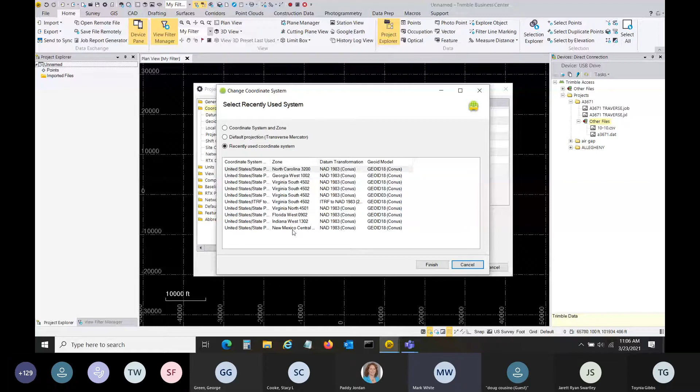So when you open up TBC and we go to change the coordinate system, all your last used systems will show up if you've been using the software. I'll just go ahead and show you guys how to set it up if you don't have recently used in there. So first thing, we'll go to coordinate system and zone, and we'll need to select our coordinate system group. I'm going to expand this out a little bit so you can actually see. We're going to use United States State Plane 1983.

Don't choose ITRF to NAD83. A lot of people see that NAD83 up there and they jump on it. That's a transformation set to go from worldwide coordinates ITRF to NAD83, and that'll shift your data about 2 meters. I've had a few people run into that issue before on jobs. So when you're working here in the States, in North Carolina, on state plane, we're just going to use United States State Plane 1983.

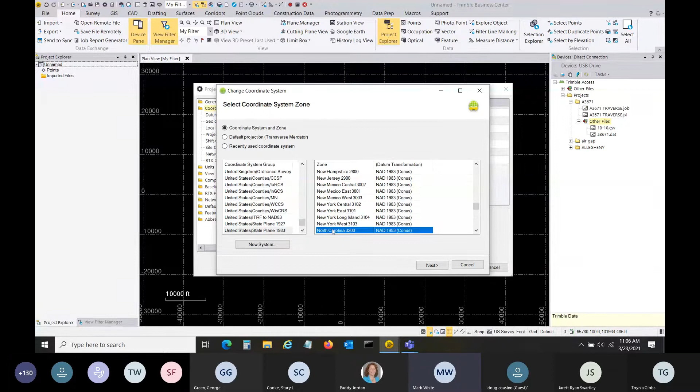And then for the zones, we have all the different zones around the U.S. So in this case, we'll pick North Carolina 3200, hit next. And for the geoid model, Geoid 18 is the latest one. They've got all the older ones in the list, so if you happen to be working on an older project, you can choose that as well.

We're going to set our geoid model quality over to survey quality. All that does is, the geoid model is a gridded file. So if it's set to unknown quality, it's just going to set the grid spacing larger. Mapping quality is going to tighten it up a little bit. Survey quality does not try to parse out that gridding to make it run faster, and that's what we're dealing with.

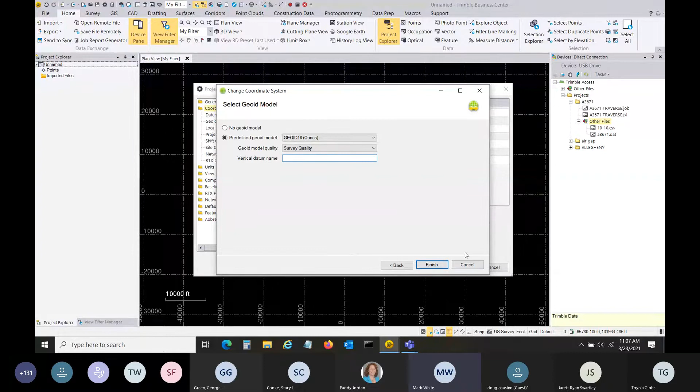And then the vertical datum, you can put something in for that if you want to, but you don't need to. It's just metadata; it's not going to affect anything. But if we're working with a geoid model and with state plane 1983 coordinates, then we're going to end up with NAVD88 by default. So you could just type that in there so that anybody coming behind you knows what you used. I'm going to leave that blank for now and just hit finish. And so now you'll see I've got my project set up in state plane. I'm going to click OK there.

And then down at the bottom of the screen here, you'll see it says US survey foot, grid coordinates, North Carolina 3200. So right now, this project is still set up in grid coordinates, and that's what the traverse was actually run out in the field with. We'll talk a little bit more about grid and ground as we go along, because when we're doing surveys in North Carolina for DOT, the final product is done on the ground. Some other states stay on grid the whole time, but here we do scale things to ground, so we'll go through that. But I wanted to start off in grid so I could show you guys that process here in TBC. So we are in grid now, and you've got a couple of different ways you could do things. You could bring in your data.

If you see over here on the right, I've got a USB stick plugged into the computer there. And on it, I've got my Trimble Access folder from the data collector. I've got a traverse job and a traverse JXL. I've got a control file that's a CSV file, and I've got a DAT file that's level data that was run with a digital level through the traverse there.

And I could bring these in any order. It really doesn't matter. For me, and maybe it's just because I'm a simple guy, I tend to like to bring in the control first. Just makes it easier for me, and then start bringing my survey data in, because the way TBC works is if I bring my control in, it works in a hierarchy. So if I tell TBC that my control points are control quality, then any raw data that's named the same thing as a control point is just going to lay right on top of it.

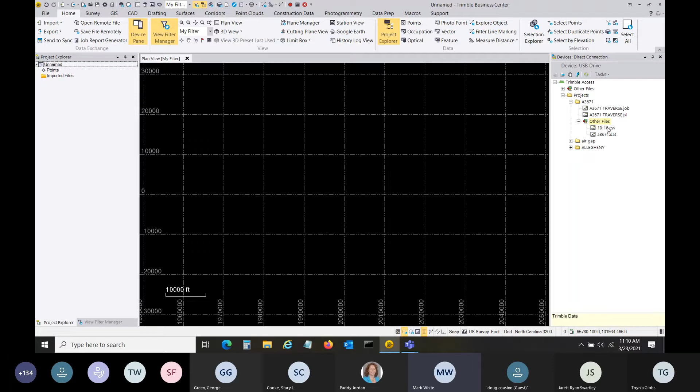But if I bring this file in, name it control, then bring my traverse in, and they're named the same, then the raw data is just going to lay on top of the control. Same thing with the level file, but you can bring it in any order. It really doesn't matter. So I'm just going to drag in my control first.

All right, so when I bring in a CSV file or a text file like this, it just opens up with a little importer that allows me to view the data, kind of preview it, make sure it looks right, and also choose what order I want it. So right now it's in point easting northing, so I'm going to scroll down because I want to work in northeast. And you'll see I have an option for control quality or unknown quality.

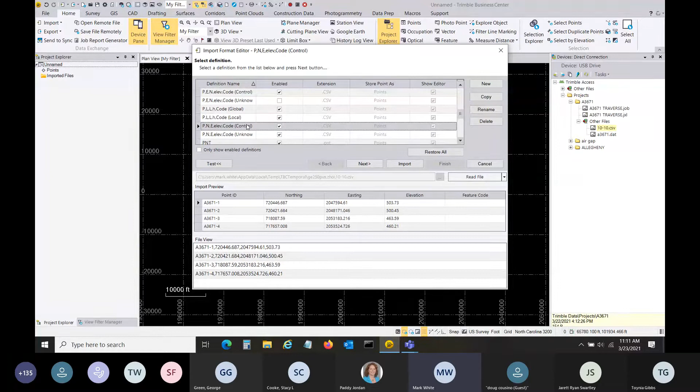I'm going to bring these in as control points because, like I said, that's going to put them at the top of the hierarchy. This is my processed GPS control, azimuth pair at either end. And that way, as long as my traverse file and my level file have the same names in them, that raw data is going to lay on top of this. So I'll just hit the import button now, and that's going to bring in my 4 control points. So there you'll see I've got my control at either end, a pair to tie the traverse to.

And the way TBC denotes stuff on the screen, if it's got horizontal and vertical control value, you'll see a triangle with a dot. If it's horizontal only, it'll just be a triangle. And if it's vertical only, it'll just be a square. So it's a lot like what you see on the NGS website, just to make things easy. So I do have my control in there. So now for me, the next logical step would be to bring in my traverse, and then I'll bring in my level data on top of that.

I do have a couple of different files for my traverse. I got a .job file and a .jxl file. When you copy stuff out of Trimble Access, it'll create both of those. I like using the JXL file, but it doesn't really matter. The job file is actually the original raw data that's on your collector. The JXL file is just an XML file format of that.

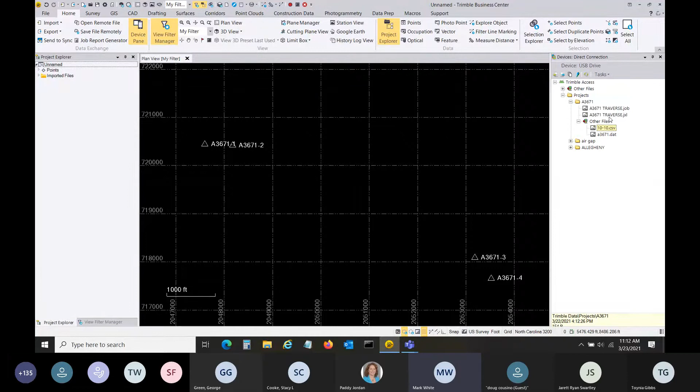The advantage to using the JXL is if the guys in the field have updated their data collector and you hadn't updated your TBC, it's not going to understand how to read that job file because you have to update your drivers. But the JXL is version independent, so the guys can be running a newer version in the field and you've got an older version in the office and you'll still be able to talk. So that's the only real difference there. So I'll go ahead and drag and drop that JXL in.

Now, if you guys are TBC users, you've probably seen this message before. It's just warning me that there's something different on the data collector file than there was in that coordinate system I set up in the office. And I always tell people, always hit the details button down here and check it out and see what the difference is. It may not be anything big. It could be that the field crew was using the wrong coordinate system, or maybe you even accidentally set up the wrong coordinate system. A lot of times, though, when I set my coordinate system up in the office, I don't assign a project height to it.

I just set the office software up. On the data collector, it makes the field crews actually put a project height in. So a lot of times that's the difference, and that's what the case is here. But if I click on details,

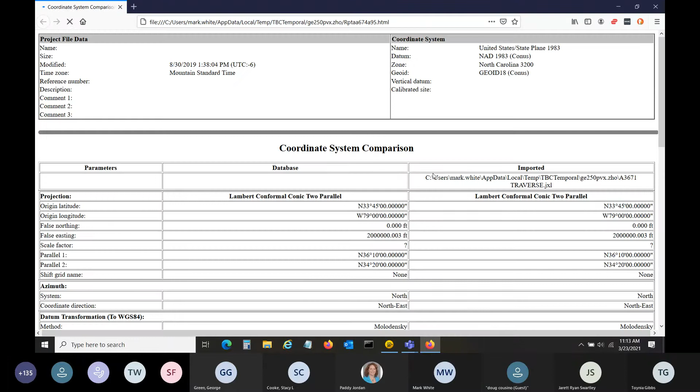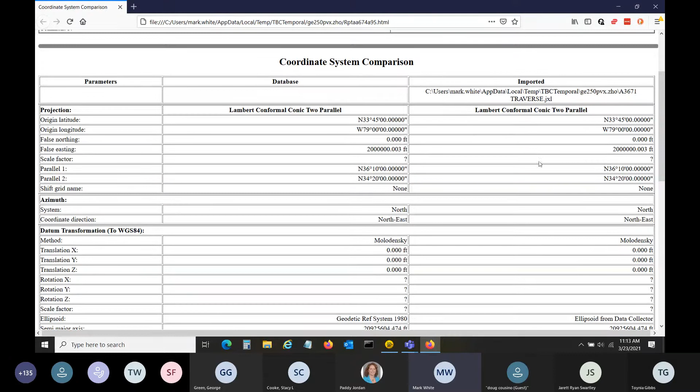I'll see I get a side-by-side comparison. So over here, I've got the database, which is the office. And then on the right, I've got my imported file, which is what's coming from the field. And as you can see, if I look at the coordinate systems, they're both the same settings for North Carolina. But down here, I've got something that's in yellow for the project height.

And again, that's just where the guys in the field are required by Access to put a project height in the data collector, just as a jumping off point for the project. And here in the office, we're not required to do that. So it's just asking me, what do I want to do?

Now, I need to let you guys know something about the way I did this project. When I ran this traverse, and I say quote unquote ran this traverse because I spent yesterday afternoon creating this traverse here in the office. A little bit easier for me by myself to create a traverse than it is for me to go out and run a mile long traverse.

So I created this traverse yesterday, and I did it without elevations because I wanted to bring a level file in. And I know a lot of guys that'll do that in the field, that'll run a traverse. If you don't want to spend the time to do measure ups, you don't have to do the measure ups in Access, and you can just run a 2D traverse. Same with a lot of softwares. You can run a 2D traverse, then run your digital levels through and bring those in. So that's what we're looking at today.

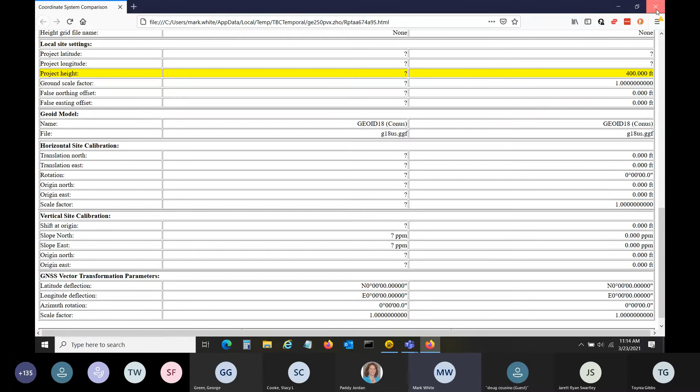So I am going to bring in this project height because since I don't have elevations, I need a project height in the file. So I'm going to close this. I know what the difference is now. So I'm going to tell it to convert to the imported file definition, so it brings that project height in. Nothing else is going to change, right? Same coordinate system, all that good stuff. I'm just adding that 400 feet to it is really all I'm doing by changing to the project definition.

And there you can see now I've got a traverse, and this is a mile long. It's running down 1010 Road out near where I live. Like I said, I keyed the information in, but it's geographically correct to follow along the road out there. So I've got that data in there now.

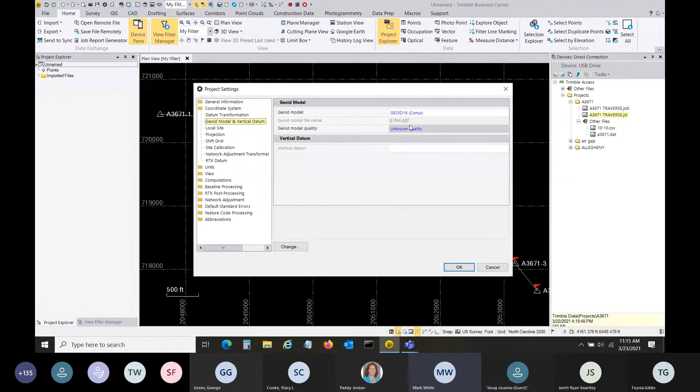The one thing I need to do since I brought it in from the field is I'm going to go back to my project settings and my geoid model and tell it that it is survey quality, because coming from the data collector, since I switched it over to that, it doesn't know that that data collector is survey quality. So I'm just going to make that one change.

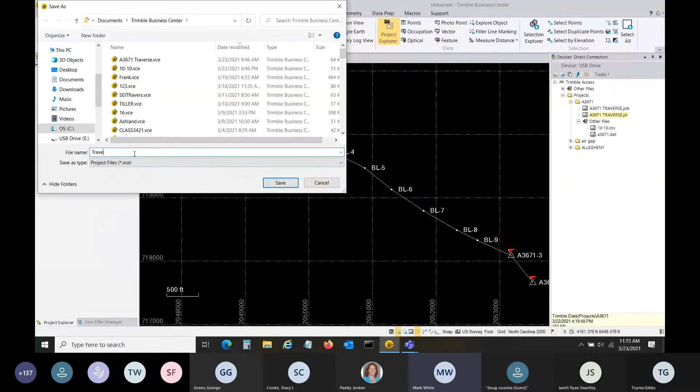The other thing I'm going to do is go to File and do a quick Save As. TBC does not auto save, so you just need to remember to save every now and then. I'm going to call this Traverse. And it's 3:23 today, so we'll just put that on there.

Save that off. So just remember, every time you do something that matters, like bring data in, do an adjustment, hit the save button up here at the top. There is an auto reminder you can set in TBC to remind you to save every 15, 20 minutes, but you do have to save. So I've got my data in here.

But here I know this is at the end of a traverse. I'm going to have some error, right? So this is just my closing error showing up. For those of you that are TBC users or Trimble users, you'll know that Trimble doesn't use different point numbers.

When you close in and you tie in on your traverse, it uses the same point number. So in the field, I used this A3671-3 when I collected that point, and also the 4. And then when it overlays, it looks at the difference between the control quality coordinate and the field data. And that error that's showing up there at the end, that's what it's going to use to adjust the traverse when we run a conventional traverse adjustment.

All right, so I've got my data in. I understand what my flags are. Let's look at a couple of ways you could actually edit your data. Over here on the left-hand side of the screen, I've got my Project Explorer. If you don't have that, you can go to the Home tab, and up here at the top, you'll see your Project Explorer. The Project Explorer is really handy for getting around in your data.

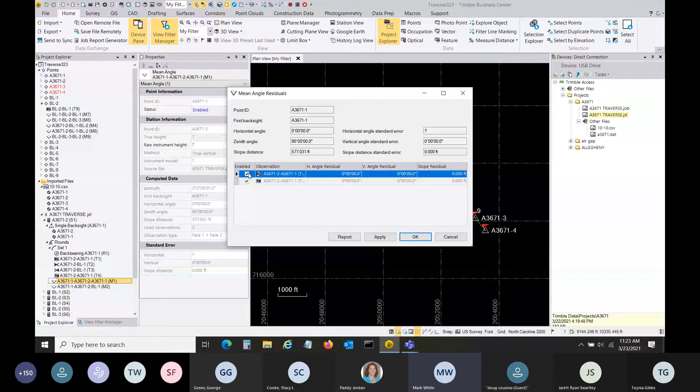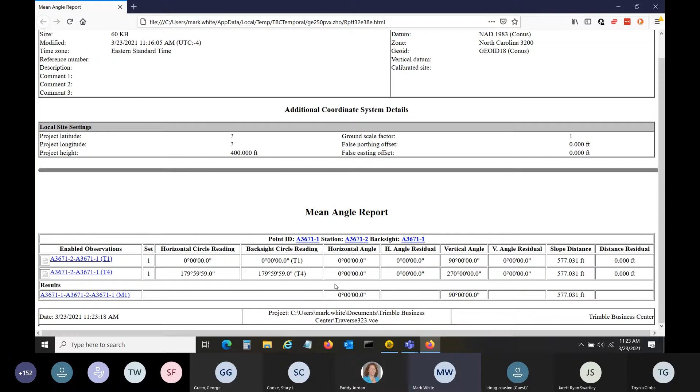Another nice thing you can do in there is right click and go to your mean angle report. And this is just going to pop up a box where it will show you your face 1, face 2, the distances, the angles that were turned, what the residuals were, all that good stuff. So you can kind of troubleshoot. If there's something outside the tolerance you have set in your settings, it's going to be red in here. So maybe somebody's using a robot and it locks on to a tail light, or a speed limit sign if you're surveying down the road, or something like that. You can catch those bad angles in there.

So in this particular set, I know I've got a couple of observations that actually need to be deleted out. So I sat on number 2, backsighted number 1 here, turned up to number 1, and then shot number 2. Well, I turned a bad angle when I went to number 2. So I set back up on number 1 and returned into number 2 and carried on with the traverse. So really this setup and this setup are both setups I don't need.

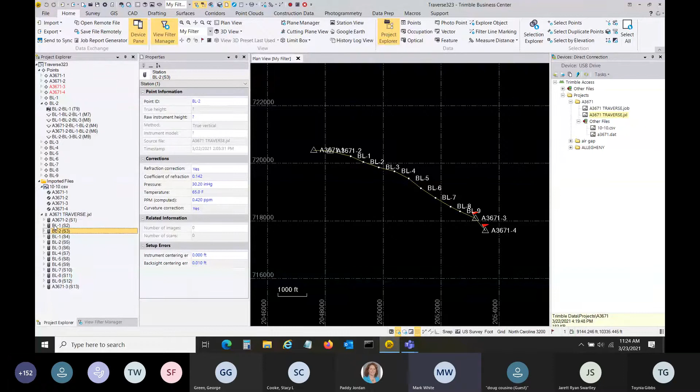So it's just as simple as going in here, selecting both of those, deleting those out, and then hitting my recompute button or hitting F4 on the computer. And now I've got that updated, got that data out of there that I don't need, and my traverse is ready to go. One other thing I forgot to say is if you're doing least squares, when I click on a setup here, you'll see I've got all my correction information, refraction, temperature, pressure, curvature.

Make sure your guys are putting that information in the field. If you want to run least squares in TBC, you do need that. At a minimum, you need the curvature information, but you should have all this stuff on if you're actually running least squares. You can come in here and key it in later. A whole lot easier if the guys do it in the field, right? But that's just quick ways to kind of come in and edit your data.

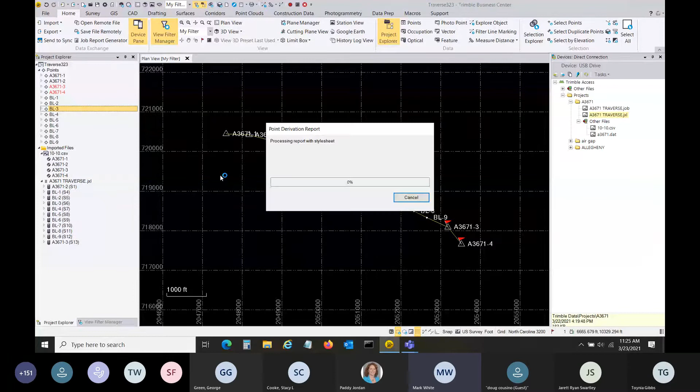Once I have that all done, I've got my traverse edited and ready. Now I can go ahead and bring in my DAT file. Oh, let me show you one more thing while I'm thinking about it. If I come up here to one of my baseline points and right click on it and choose the point derivation report, the derivation report will show you what data was used to calculate this point. So right here, I can see the northing and easting. I don't have any elevations right now because I didn't run elevations on this, right?

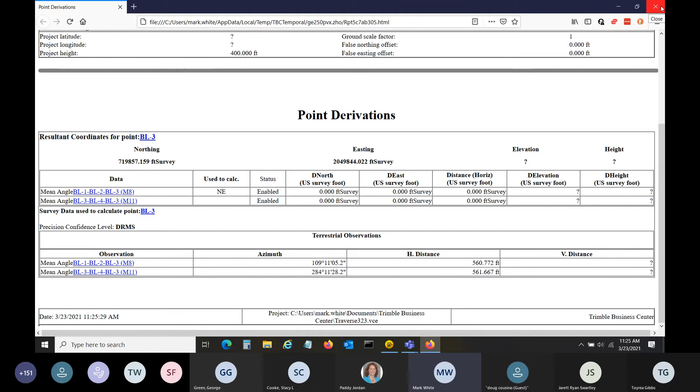But the northing and easting is coming from mean angle number 8. So with the instrument sitting on BL2, backsighting BL1, the doubled angle over to BL3, that's what is being used to create this right now. So we'll kind of take a look as we bring in other data and we adjust it. How does it affect our point derivations? That's why I wanted to point that out there to you.

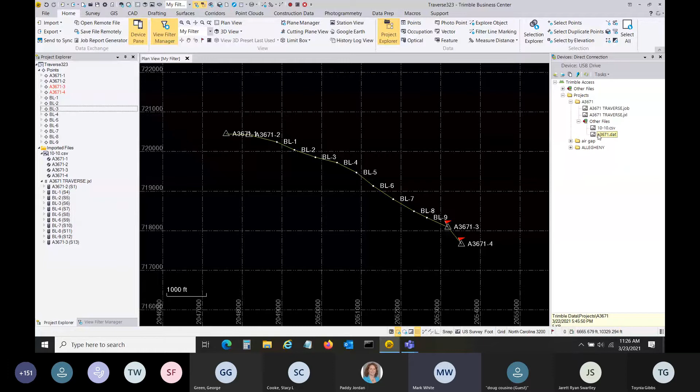So next thing, I got my traverse in, I've edited it, I got all my data where I want it. Next thing I'm going to do is bring in my level file. So this is a level run with a DiNi level run all the way through the project from point number 1 all the way over to point number 4. So I'll bring this information, just drag and drop it in. When it comes in, it is going to open up the level editor for TBC.

You can see, again, just like the raw data coming from the instrument, anything we actually shot in the field is grayed out. We can't change that. That's actual raw data. We can change the point numbers. We can change whether something's a benchmark or it's a computed point, but those are really the only things we can change in here. Now, right now it's set to use raw elevation, so that's what we're seeing down here. I am going to adjust this run here in just a minute, so it'll automatically change over to adjusted at that point.

Again, like I said earlier, one thing you'll see, these are in blue, so these point numbers can be edited. I do want this to be a benchmark, the first one, and then if I scroll down, I want the last point to be a benchmark as well. And that's how the level run was entered in, but if you needed to, you could set those as benchmarks. So you can do the drop down there and you can set it to benchmark. You can tell it's control quality and you can key an elevation in. So if you need to change that, it's in blue, you can edit that.

But I do need these point numbers to be the same as they are here in my file. So I can real quick do some editing here. I can put a dash mark in, because if they're labeled the same, then the raw data is going to overlay. So I need to put little dash marks in here. That'll just take a second. You could bring this information in and do it inside TBC, but it's just as quick to do it here in the editor. And then it's going to understand that these elevations need to fall right on those control points. And now those points that are horizontal only in the job will have good elevations on them.

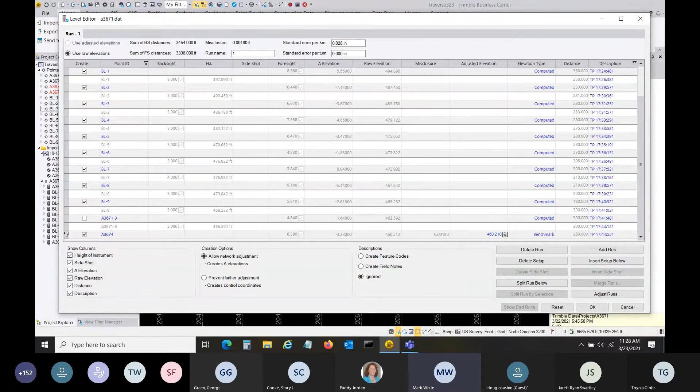So it's just a quick way, whoops, that should be BL8, to bring your level data in. We're going to adjust it next, so it's going to fall right on there. And then this is A3671-3, so it'll match up there. And A3671-4. All right. Now, I don't want to compute an elevation for this one, A3671-3, because that is one of my control points, already has a good elevation. It's not going to compute 4 because it's a benchmark.

And let me scroll back up to the top. I will uncheck number 2. I don't want it to create an elevation on number 2 either. And it's not going to create one for number 1 because, again, it's a benchmark. A couple of other things down here at the bottom, creation options. I can allow network adjustments, which is going to create delta elevations for this, or I can say prevent further adjustment and create control coordinates.

I'm going to adjust this level run and let my DiNi level run be my control because I ran it from one benchmark through the job to another benchmark. Up here at the top, you'll see it closed really well, less than a couple of thousandths. And if you've ever run digital levels, if you got a good digital level, you're going to get really good closures on it if your elevations are good at either end. So, I got a good closure here.

I'm just going to go ahead and create control quality coordinates and let these be my elevations. I'll adjust the horizontal data. I'll do a traverse adjustment. I'll also show you how to do a least squares adjustment, but I'm going to keep this level run as my control coordinate. So I'll set that down here.

The other thing is I'm going to tell it to ignore the descriptions, and that way any descriptions that are in here, it's not going to try to tag them onto what's already in my traverse file. So once I get this set the way I want it, get all my names updated, tell it which ones I want to create and not create, I will choose to adjust this run.

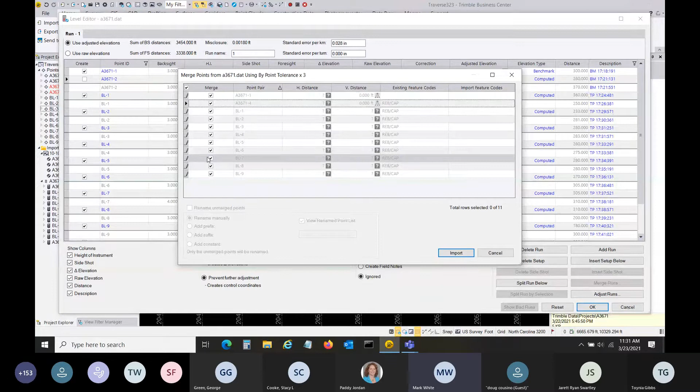It's telling me, hey, these already exist. Do you want to merge them together? So I'm going to check the box at the top and tell it to merge all of them, because again, that's why I wanted to name them the same. I want it to lay those on top of there. So now I'll import those in, and you'll see a quick change the way things look on the screen.

Again, I've got horizontal and vertical control quality on these points on the end. I got a triangle with a dot, but now you'll see all these baseline points have a square on them, which is a benchmark on the NGS website. So basically all these have control quality elevations now. And if I look at one of these points, I'll pull up BL3 again, right click on it, go to my derivation report.

You'll see the horizontal is coming from the traverse. The elevation and the ellipsoid height are coming from that DAT file, which is coming from my level data. So derivation reports are nice if you ever have a question about where your data is coming from, because when you start mixing GPS, total station, and level data together in the same project, it's good to understand which one

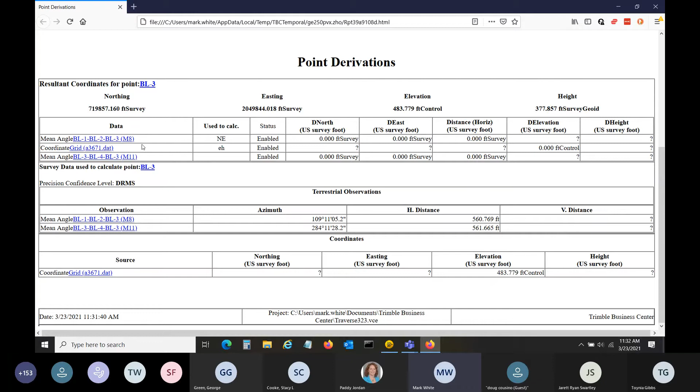is controlling your coordinates. And then later on, when we actually run an adjustment, we'll see that the adjusted coordinates are now controlling our coordinates. But right now, total station is doing horizontal. The elevations are all coming from our level file. All right, so I've got that in there. I've edited my traverse data. I've edited my level data.

Now, before we actually do any adjustment, we need to scale this job up to ground if you want to work on ground. You don't want to scale it after you do the adjustment. TBC is going to get mad at you because, the way TBC works, when we scale things, we hold one point fixed and all the distances are going to get scaled out from there. So our coordinates are going to change.

Well, the software doesn't want to change adjusted coordinates. So it's going to tell you it's going to rip the adjustment out. You're going to have to readjust. So it's a good idea to go ahead and get everything moved to ground before you do any adjustment there.

So to get this to ground, I'm going to go to the survey tab. I've got my local site settings up here. Click on it. And I need to select which point that I want to scale from. So if it's a large project, a lot of times people like to scale from the beginning.

A lot of times people want to scale from one of the beginning control points, so I could do one or two. This is only about a little over a mile long here, so I'm not going to get much warping by holding one at the end. So I'm going to go ahead and control and pick point number 2, because that's the point I first have my instrument on. Again, though, you're just picking what point you want to keep grid and ground equal at. So I'll select that point.

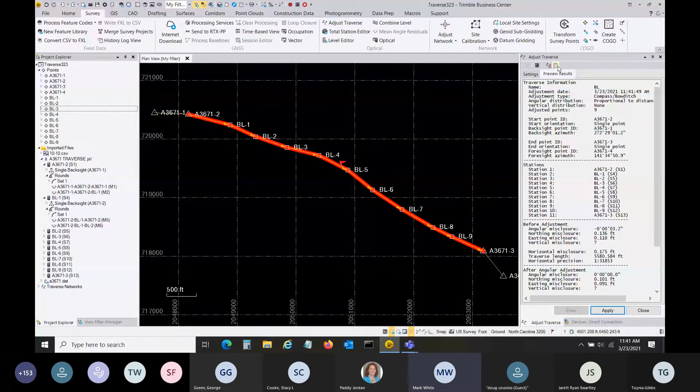Then I can see after adjustment, once I apply the adjustment, what's it going to do? My angular misclosure goes to 0, obviously, and it actually makes it a little bit better. I'm going up to 1 in 41,000 right there. All right. So if I'm happy with that, I can go ahead and hit the apply button and close that out. I wanted to show you guys this because you probably would want to print out a report with all your traverse information.

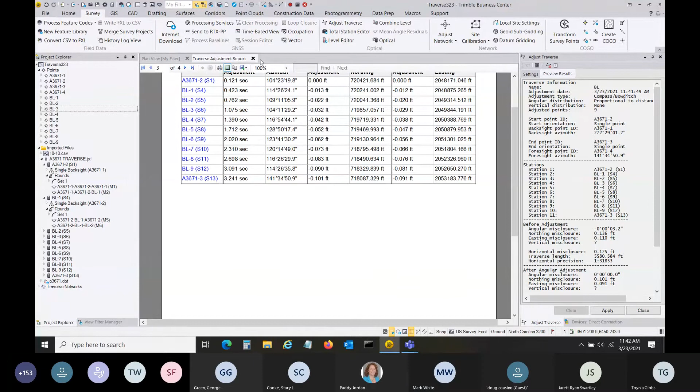So there is a report that it'll generate by clicking on the report button up at the top there. Maybe. Computer's running a little slow. There we go. So that's all our information showing up there with all our adjustment information and a nice little picture of the traverse at the end. So then you could save this off, save it as a PDF or Word file, and just save it off to put into your survey file and have your traverse adjustment information there.

Now, when I close this, you'll see now my points, instead of being green, all my adjusted points have purple lines running in between them. That's just so I have a visual indication that I do have a traverse adjustment there in the job. So when I open the project up, I can quickly see that it's adjusted. You'll see that the lines between the control are still green. They weren't adjusted. That control was held fixed. So it's just the stuff that got adjusted that's actually purple in there.

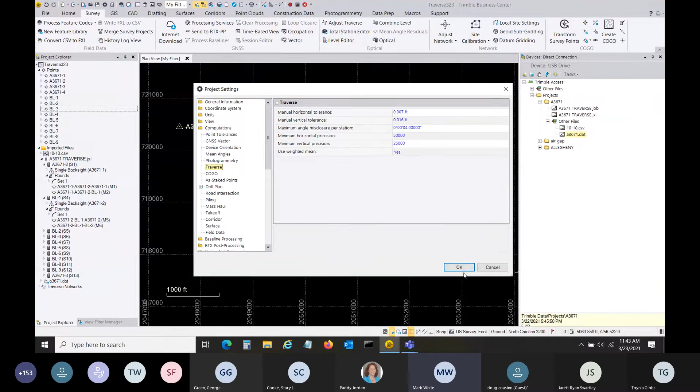I do have a flag on it. By default, TBC sets its tolerances to 1 in 50,000. So that could be changed just by going up here to my settings, my computations, and traverse. By default, it's 25,000 for vertical and 50,000 for horizontal. And I'm at 41,000 right now. So I could change that if I wanted to, if I didn't want to see the flag.

I am going to hit the save button real quick. Or I tell you what, I'm going to undo it and then save it, so then we can do a least squares adjustment. But anyway, that's got our traverse adjustment in there. Now, if I go and I look at BL3, I told you we'd look at the derivation reports to kind of see how those coordinates are getting calced up. Now in my derivation report, my horizontal coordinate for BL3, 4, 5, 6, 7, 8, 9, they're all coming from traverse adjusted. The coordinate for the elevation and the ellipsoid height is still coming from that level file because I locked it in as control.

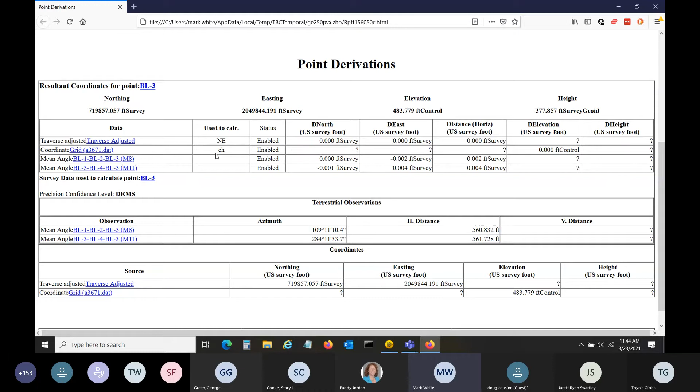So now I have a traverse adjusted northing and easting, and I've got my digital level data for my vertical. So I'm going to hit the undo button real quick. One of my favorite buttons when I'm working with data. I'm going to undo that traverse adjustment because it's not really going to do us any good to run a least squares adjustment on already adjusted data, right? So undo that. Now I'm going to hit the Save tab just so if my computer blinks, I don't lose anything. And I'll also close this device connection just to give us a little more room. So traverse adjustment, done. What if we want to do least squares?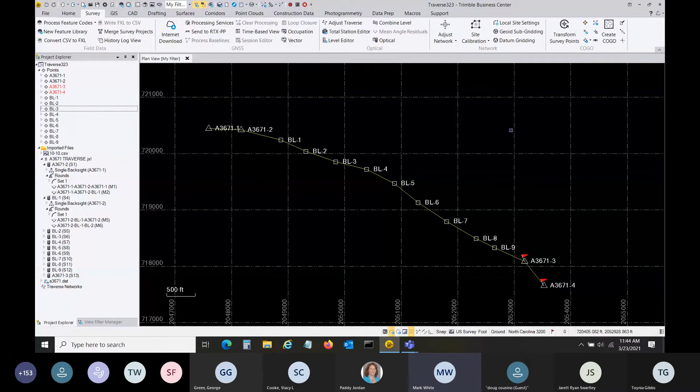So up at the top under the Survey tab, we have an option for Adjust Network. I can click on that, and you'll see anything that's labeled a control point can be held as a constraint. So the pair at either end is control, so you'll see those at the top here. And then all those baseline points, you see they can only be checked for vertical for the elevation because they are control points as well. So that's why you're seeing all of those in the list here.

In a lot of cases, you might only have your 2 points at the beginning and the end, but because I brought in digital level data and made control out of those elevations, they're showing up in the list as well. If you don't have any points showing up that you can hold fixed, it's because you haven't assigned control values to any of your coordinates.

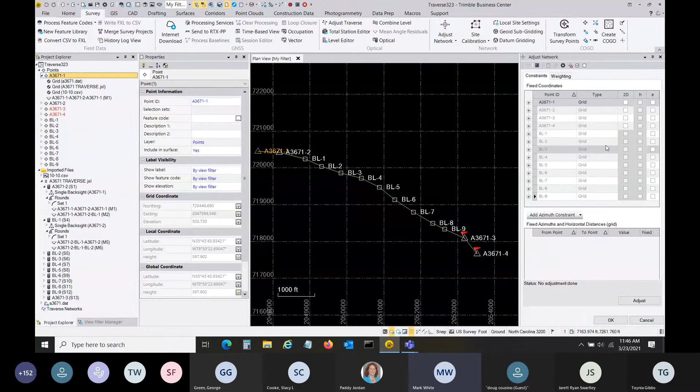So in that case, if you needed to, you could double click on a point here in the list, go up to the Add Coordinate button, and tell it that it's control quality for whatever you want to hold as control, hit OK, and that's going to add control quality to that coordinate. And I'm just going to cancel because I've already got control on that point. Then those points are going to show up in your list, okay? So you have to have points that are denoted as control quality in order to hold anything fixed in a least squares adjustment.

So the first thing we need to do when we get into least squares is we need to get our settings right. Then we need to do a minimally constrained adjustment. Once we have a minimally constrained adjustment and a good weighting strategy in place, we can go ahead and do a fully constrained adjustment. So the first thing we're going to do is set our settings up.

And what we're really going to do is set our weighting strategies up. And when we're doing that, what we're doing is telling the software how good our equipment is so that it can assign error values to the different equipment that we use. So under default standard errors, if I'm using a total station, I always set that to project settings. And then under the total stations tab, you want to set your default standard errors up to what your instrument specs are. So you can look at the data sheet for your gun.

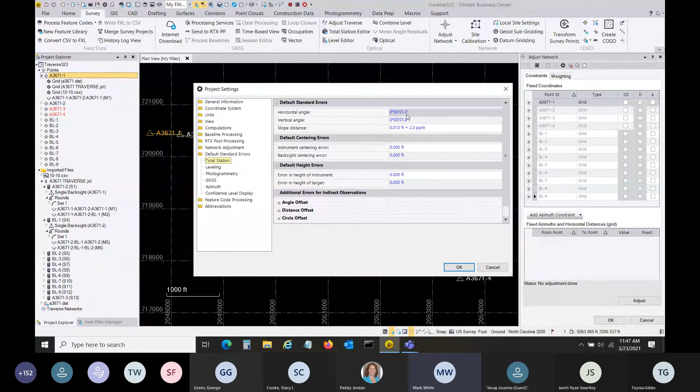Like if this was a half-second S9, I wouldn't want to leave this on 1 second. I'd want to come over here and I'd want to set this at half-second. So I had my really good traverse gun out there, not running my 10-second. So I got my half-second instrument, and then also that S9 is rated for 0.003 of a foot or 1 millimeter in the distance. So I can set this up to 0.003.

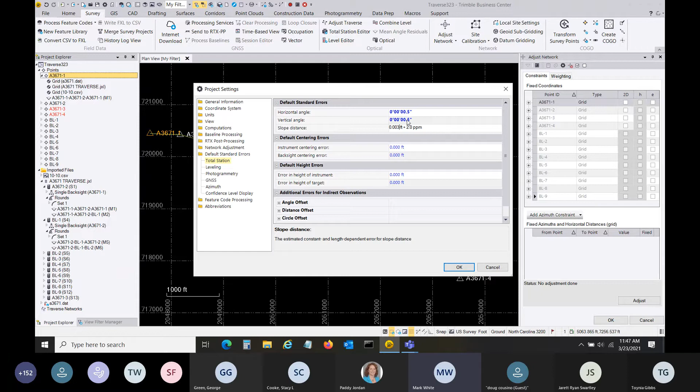So whatever your instrument says it's spec to, that's what you want to put in here. You don't want to be running a 5-second gun and have it set to 1 second. Conversely, you don't want to be running a half-second gun and have it set to 5 seconds, right? You want the software to understand what equipment was being used.

And then on your centering errors, this is really going to depend on how good you keep your equipment up, right? If I take my equipment in and have it calibrated on a pretty regular basis, and I've got field crews that can actually set the instruments up and do it properly, then I'm not going to have very much centering error in here. Trimble recommends starting off with 0.002 to 0.003, which is right about a millimeter.

Now, if I know that I've got a gun that the tribrach hadn't been adjusted in 3 or 4 years, maybe I bump that up to a couple of millimeters, like 0.007. If I'm backsighting a tripod with a tribrach on it, and I know it's adjusted, I'm going to start off in that 0.002 to 0.003 range. If I'm backsighting a pole, and it's got a 40-minute vial on it, I might set that to a hundredth even, right? If the tip's rounded off, maybe even a little bit more.

The key thing is you want to put in realistic numbers for your weighting values. You don't want to put in something that's going to give you too much wiggle room. You don't want to put in something that's not going to give you enough wiggle room. We're setting our weighting for least squares to look at this information and go, okay, here's how much error I should expect when I do the adjustment.

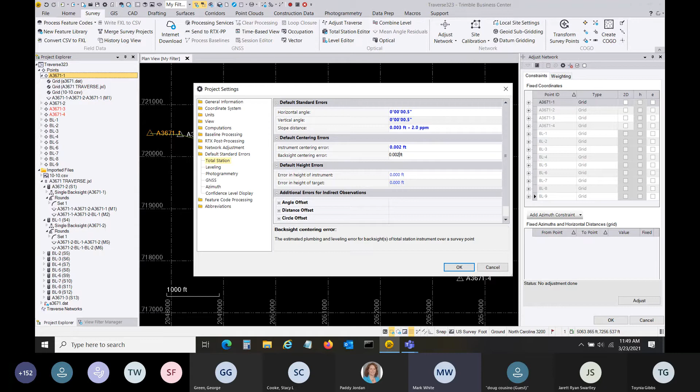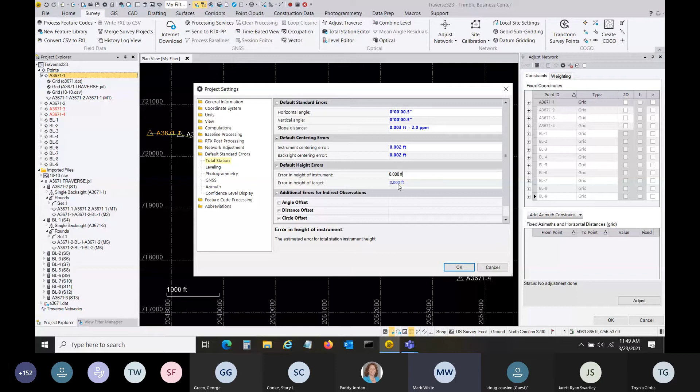So I don't have height errors in here. But again, if you're measuring with a tape and you're not using the bottom notch on a robot, so you're having to wrap the tape around, maybe you bump it up to 0.007. If you're doing bottom of notch, keep it in that 0.002 to 0.003 range. Target, same way, depending on how I'm measuring it up, I might give a little more, a little bit less, but just do some testing. Don't just guess at this, but put real information in here.

I'm not going to do anything with my leveling data, but if you were adjusting that, you could change your settings here as well. I do want to go under my network adjustment, and under general, I want to set it. If I was going to do a vertical adjustment, I'd leave this at yes. I'm going to set this to no.

And then you get the choice whether or not you want to use individual observations or mean angle results. So if I use mean angle, it's just going to use the mean angle. If I want to use each individual observation, I can set it to individual observations. There's pluses or minuses to both of them. I don't have time to go too in depth with that this morning, but I'm going to use individual observations for this.

Many different ways to skin that cat, and we could get into a long discussion on it, but I'm going to go with individual right now. Other options, if you had property corners in here, you're running an ALTA or something, you could set it to include the side shots so that you get error ellipses on your side shots as well.

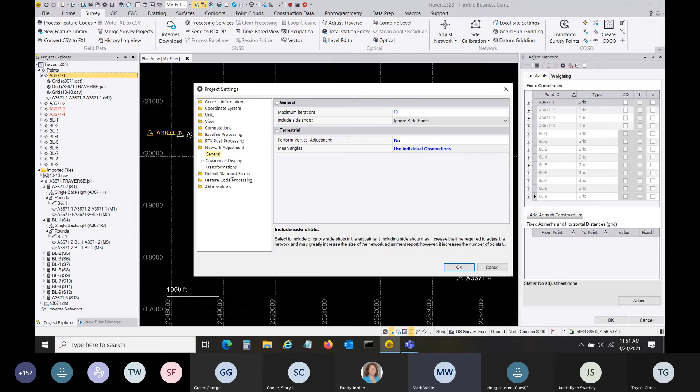If I've got topo data in here, I can ignore the side shots, because when the control points get adjusted, the raw data that's tied to them, those side shots are going to move with it. So generally speaking, unless I'm trying to do an ALTA report, I'm going to leave that on ignore. So for this example, I'm not doing vertical because I got level data, and I'm using individual observations there. Got my default standard error set up properly.

I'll click OK. Now I'm ready to do a minimally constrained adjustment. For a minimally constrained adjustment, you are going to constrain the minimum information that you need to do an adjustment. Generally speaking, for a traverse, for a conventional survey, that would be 1 point and an azimuth. If I'm doing GPS, it's just 1 point. If I'm doing total station, it's 1 point and an azimuth. That constrains me into the coordinate system.

So I'm locking my data to 1 point, a northing and easting, and I'm locking it into 1 azimuth for a direction. So in this case, since the gun started off at point number 2 and my first backsight was number 1, I'm going to choose to constrain number 2 in 2D, and I'm going to come down here where it says add an azimuth constraint, and I'm just going to select point number 2 for my first point and point number 1 for my second point there. And that's going to automatically calculate that azimuth between the two. So I'm locking down number 2 horizontally, and I'm locking down the azimuth between 2 and 1. And this is going to do a minimally constrained adjustment.

What that minimally constrained adjustment is going to do is it's going to adjust the data just holding that minimum information. So it's not going to warp my measurements to the other control points down here at the end. It's going to adjust this freely. And what we're looking for is outliers, which are any observations that don't fit statistically with the other ones. And we're looking to make sure that the weighting strategy that we just keyed in is a good weighting strategy for our data.

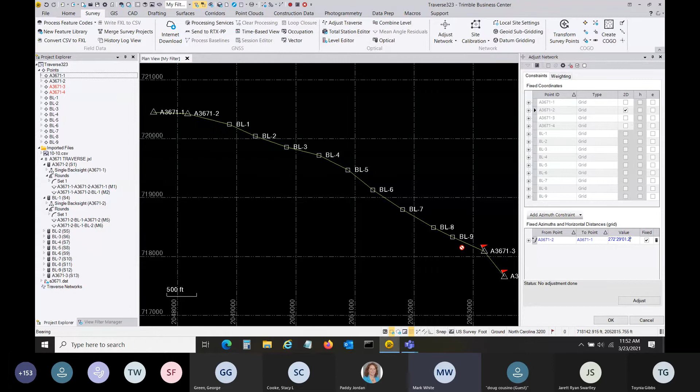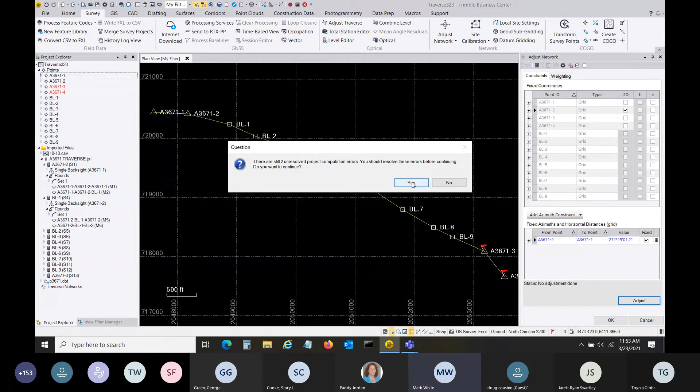All right, so once I get that in there, I'm going to click adjust. It's going to pop up and tell me that I still have these 2 red flags down here at the bottom. Are you sure you want to keep going? Yeah, I know what those red flags are, so I'm going to hit yes. And it's going to process the data there. You see some error ellipses show up on the screen.

You can see that since I held a point down here fixed, the error grows the farther away I get from it, right? And that makes sense because that's the direction our traverse went. We know we started off with 0 error here because that's the beginning of our traverse. And we know we got like 17 hundredths worth of error when we get down here because that's how we close. That's what the flag popped up and said. So that makes sense that our error ellipses are getting worse as we go down the job there.

But what we're looking at is the reference factor and the chi-square test and the degrees of freedom. Those are the things that you want to look at for this minimally constrained adjustment. Our reference factor, if the weighting we did is a good weighting estimate, we're telling the software expect this much error going into it. When it adjusts it, if it finds the exact same amount of error that we told it to look for, that reference factor is going to equal 1.

We had this much pre-adjustment error in there. It adjusted it. It found this much post-adjustment error. If they're equal, it's going to equal 1. If there's a little bit less error, it's going to be below 1, which is what we have here. If there's more error in the data than we estimated, then it's going to be above 1.

But anything between like 0.9 and 1.1 is usually going to pass the chi-square test, which is just looking at your degrees of freedom, which down here is the number of redundant observations we have. It's going to look at that. It's going to look at the quality of the data. Do you have any outliers? What are your mean angle residuals?

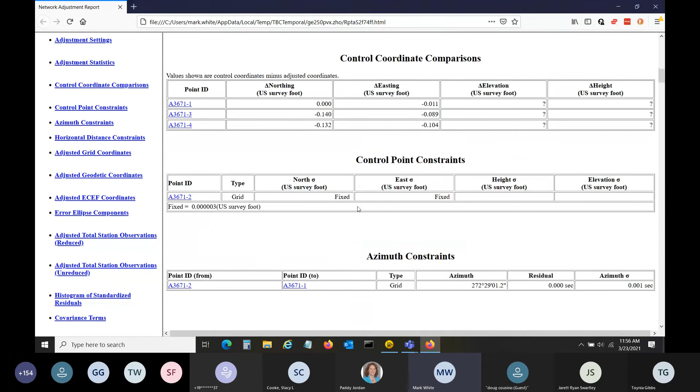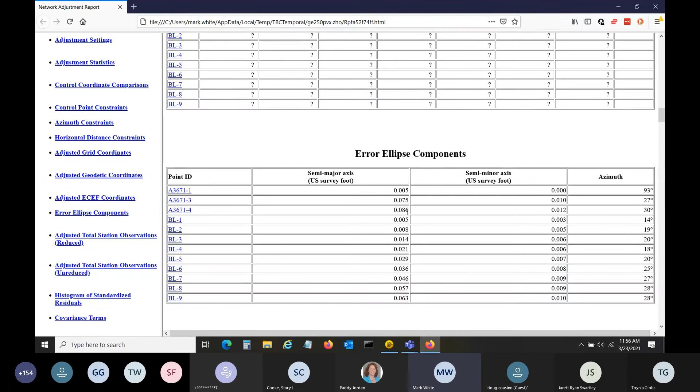What I'm really looking for is how much error do I have in here? Are my coordinates being adjusted a lot? What are my point error ellipses coming out to be? Again, the farther away I get down to the other end, the worse my error ellipses are, right? Because they're starting off as 0 and then it's growing as I go down. This is what I'm really looking for, is any outliers. Any outliers that I have are going to be on this list, the reduced observations up at the top, and they're going to be in red.

So if my reference factor was high and I failed the chi-square test, I'd look here. Chances are I'm going to have 1 or 2 outliers, maybe 3 or 4 outliers. Those are just measurements that statistically don't fit with the other data. And that's one of the beautiful things about least squares: you can do a traverse adjustment with a compass rule, but if it busts, it doesn't really point you to which observations are bad.

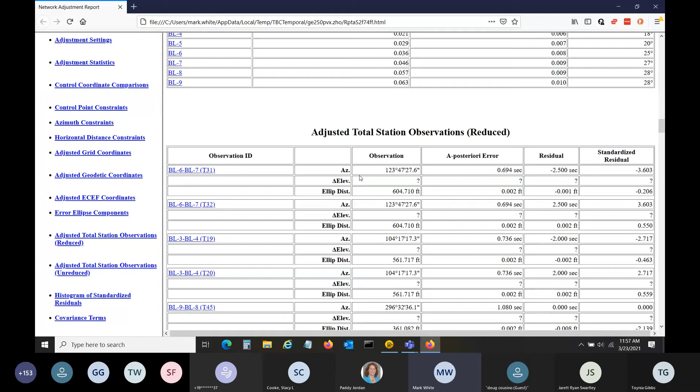A least squares adjustment will adjust your data, but the thing I really like about it is it's going to show me where my outliers are. It's going to point me 9 times out of 10 to the observation itself that's bad. I can disable that. I can rerun it in the field, and now I've got a good traverse. So that's one of the beautiful things about that. Here we don't have any outliers. So at this point, I've got a couple of choices on how I can fully constrain this. I've got a good minimally constrained adjustment now.

If I wanted to hold this other point number 3 in the azimuth down here, let's say you had a little bridge project you were working on and you set your control with VRS, shot it multiple times and averaged it. Your data is not super tight if it came from the VRS. So you might only want to hold a control point at this end, control point at this end, and hold the azimuth either way to adjust to, so you're not introducing any of that distance error between the points.

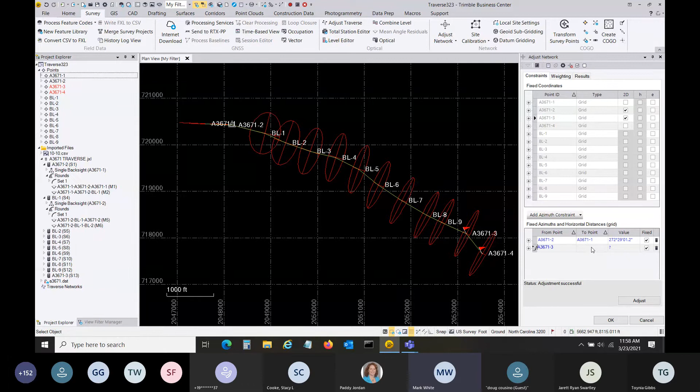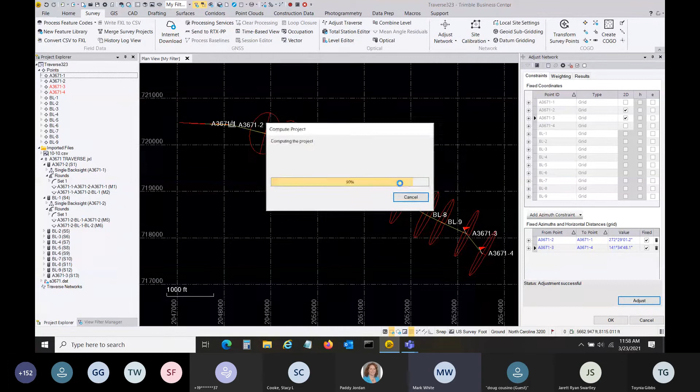I could lock down number 3, and then I could add another azimuth constraint and just tell it that here I want to go from point number 3, click on it there, and then I want to go to point number 4, and it's going to count that up. Now I've got the 2 control points here and here held fixed, and the azimuths going out to the pairs. And now I could adjust this, and this will do a fully constrained adjustment, but it's just constraining 2 points and 2 azimuths, right?

Again, my reference factor is fairly low. I passed the test, but you can see there's a more even distribution now, right? Because it's going from 0 to 0 here, coordinate value, holding the azimuths on either end, and it's adjusting that out. So if I look at this report real quick, you'll see the change in the error and how it's distributed.

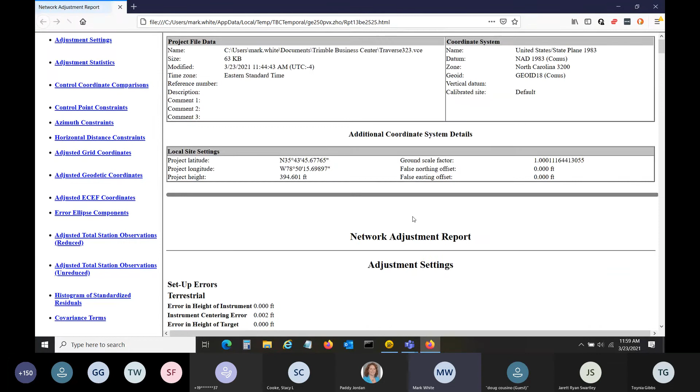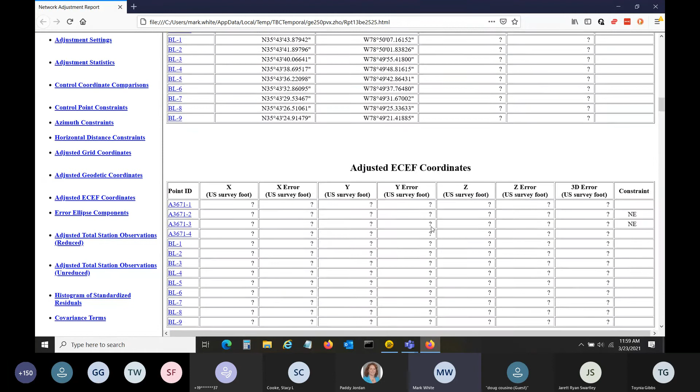Scroll down real quick. You can see now my control fits pretty good on either end, but you'll see these errors are a whole lot smaller now, right? Because it's being evenly distributed out through there. And my error ellipses are a whole lot smaller now too. And they're bigger in the middle instead of being at both ends, right? Because they're going to zero out at the ends and they're going to be a little bit larger in the

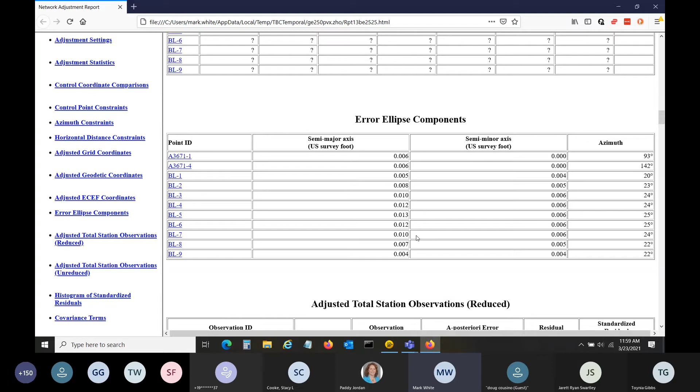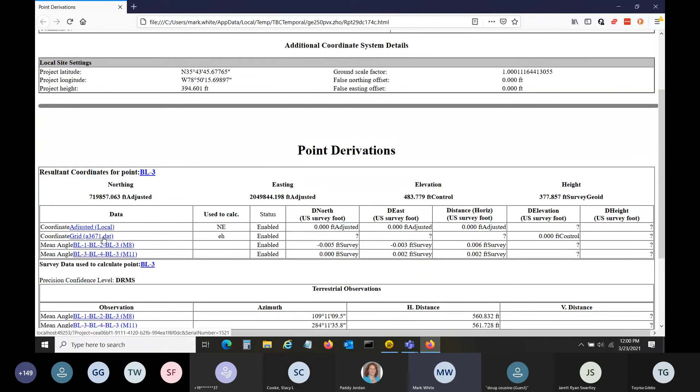middle there. And now also, if I go to a BL point over here, this BL3, right click on it, look at my derivation report. You'll see now that my horizontal is coming from the adjusted coordinates, the northing and easting is coming from the adjustment, and the vertical's still coming from that level file there, right? So just keeping up with how our coordinates are coming.

Now, real quick, and this will be the last thing before we export the data out, I'll hit cancel here. Actually, I'll go back to the constraints and I'll take these out. And if I wanted to lock down the coordinates at either end, if I felt like I had good control, maybe these were static points at either end instead of VRS points on a regular big job, I could hold the points fixed and adjust it.

And you'll see now it went up just a little bit because now I'm adding in the distance error between the 2 points, not just holding an azimuth. So it failed at this point, but it's still not very high. It still looks good. So I wouldn't go back in and rescale it. The only time we set that scaler in there is in our minimally constrained adjustment. Here, I just know that my reference factor is a little bit higher because now I'm taking my measurements and I'm warping them to my control.

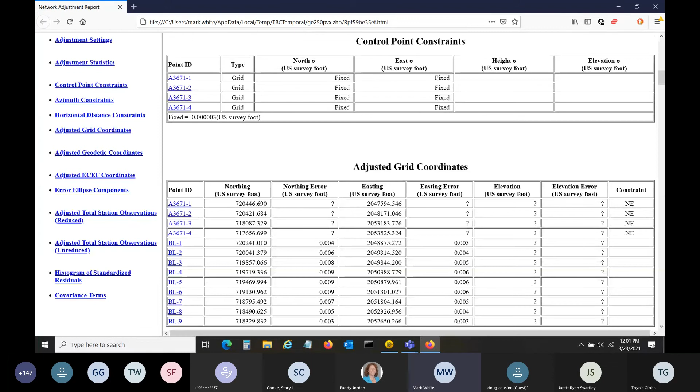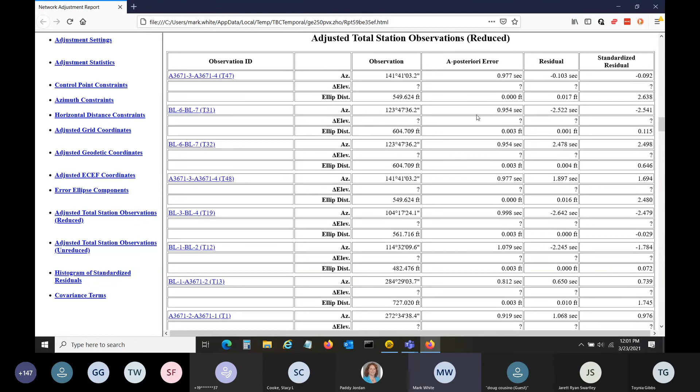All right. Again, I could look at the adjustment report, make sure I don't have any outliers in here. Statistically, everything's locked down. My error ellipses are about the same, a little bit more now, where they were right around a hundredth. Now they're about a hundredth and a half. And my total station observations are reduced. There's no outliers in there, so everything looks good.

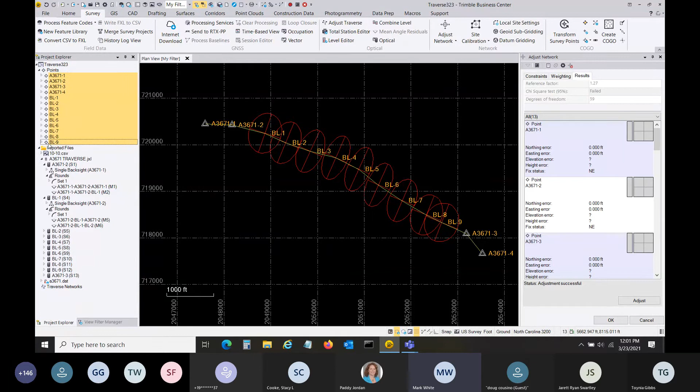All right, so now we've gone through a couple of different iterations. We brought our data in. We've edited it as needed. We've scaled it to ground. We've done a regular traverse adjustment. We've done a least squares traverse adjustment on it, right? So now if I wanted to get my adjusted control out, I can just come over to the side here. I can select those points there, and under the Home tab, I've got a few different exports I can do.

Generally speaking, if we've done all our data reduction here in TBC, all we really need to do is export out a point file to go into ORD, or really any CAD software, right? Because then we've got our points that are going in there. If we had topo data in there, the codes are going to be on there, so we can auto process our line work in ORD if we needed to. But under the custom tab, I have an option for point northing, easting, elevation and code. This is going to spit out a CSV file, so if you need it in ASCII, you can edit that.

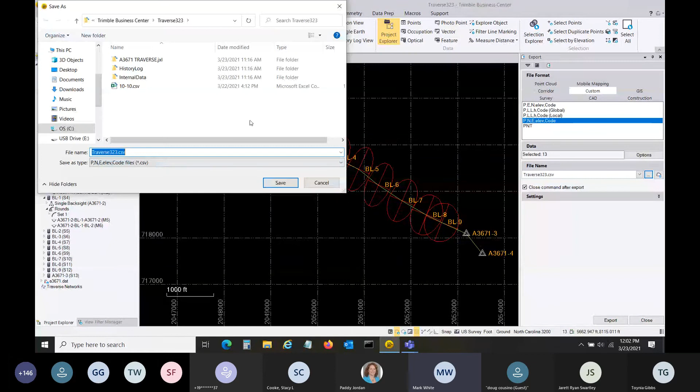All I have to do is say, where do I want it to go to? I'll spit it out on the desktop, save that, export it out, and now I've got my point file out there on the desktop. I will show you a few other exports you can get out of here. Under the CAD tab, you could take your data out as a DWG, DXF, SketchUp, GIS. You can send it out as most of your Esri file geodatabases.

KML, KMZ, if you want to share this with a customer, with a client, so they can look at it in Google Earth and see what you did. And then survey, if you needed to send it back to your guys in the field, you could send it out as an Access job or a Survey Pro job.

So, point files, CAD files, or survey files, or even GIS files to get it out to people, depending on what the stakeholders on the other end need.

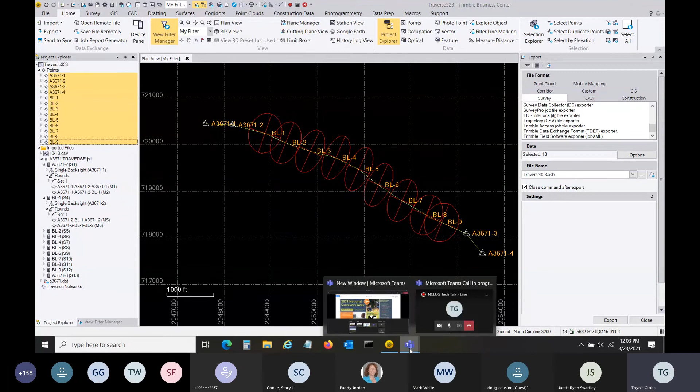Thanks, Mark. That was awesome. I'm sorry, I'm echoing in my ear, so I apologize for that. We did have one person who had raised their hand, Tom Porter, to ask a question. So Tom, if you wanted to ask your question. Maybe Tom? I believe he has taken his hand down, so perhaps that was a mistake. I got lucky and answered his question by mistake. Maybe you did. Maybe you got to it and he didn't have a chance.

I do have a question that says, why would I go through all this in TBC and export to ORD? Well, that's a legitimate question, but there's a lot of surveyors, I'm only speaking from my own experience, who are more familiar with the TBC software and find it more comforting to actually do the adjustments and everything in a software they're familiar with, and then still be able to bring it into ORD so that they can make that choice and submit in a DOT format or for another client who needs their stuff in ORD.

Yeah, really, it's about what you're comfortable with, right? We're going to have to reduce our data somehow, some way. Some people might want to reduce it in their CAD software. Some people are going to want to reduce it in a package like TBC. But that was the whole point of the exercise, just getting your data reduced so that when you do draw it up in ORD, you've got it reduced in the easiest way possible.